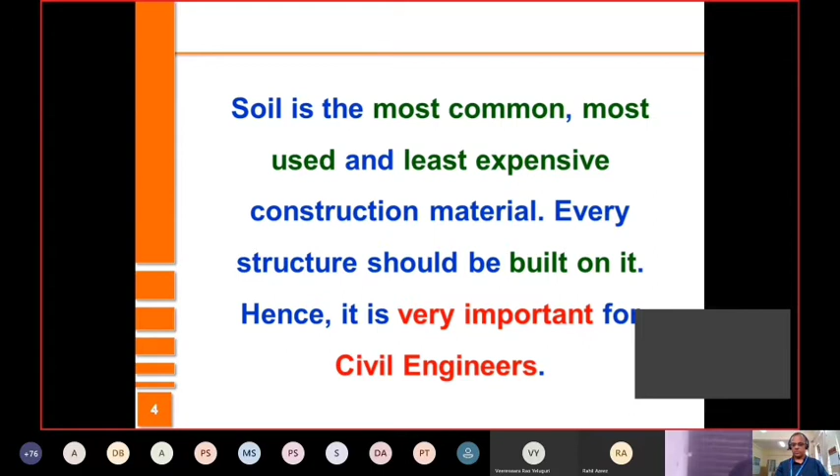In addition, you will build structures on soil only. It bears all the load of the structure. Therefore, I want you to accept my statement that it is most important to civil engineers. I quickly go through this. I mentioned that it is the oldest construction material. It is a material naturally available, and you don't have to spend anything for using this as a construction material.

You can modify the properties of soil. Today we have so much of advancement in technology, in geotechnical engineering. You can get the soil of whatever property you want today. You want to increase the safe bearing capacity from, let us say, 50 kilonewton per meter square to 200, you can do so. You want to make it very porous, you can do so. And then, I'll probably in one of the slides show you that it is a complex construction material.

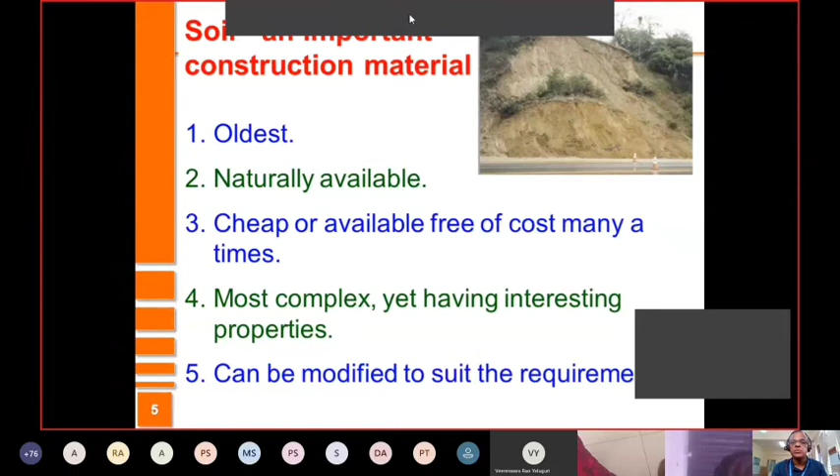Requesting control. No, don't accept. Don't accept. Oh, I just accepted it here. I don't know why. When I change the slide, can you see the change? You can continue now. No, it's fine. Are you able to see the slide change? Yes, we can see. Okay, okay.

And then I mentioned that soil is a material which is a combination of solids, liquid, and gas. And solids are of different sizes and shapes connected together by the contact. And when you apply the load, when you keep the soil for a long time, there is every possibility that the positions of the solids may change, and hence the volume of the soil may change. In addition, the void space may be filled with water sometimes, air sometimes. Therefore, with time these keep changing, which make the soil complex.

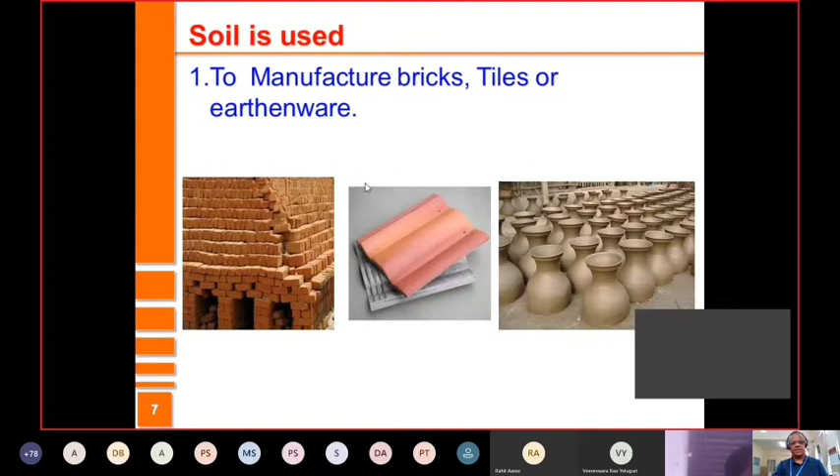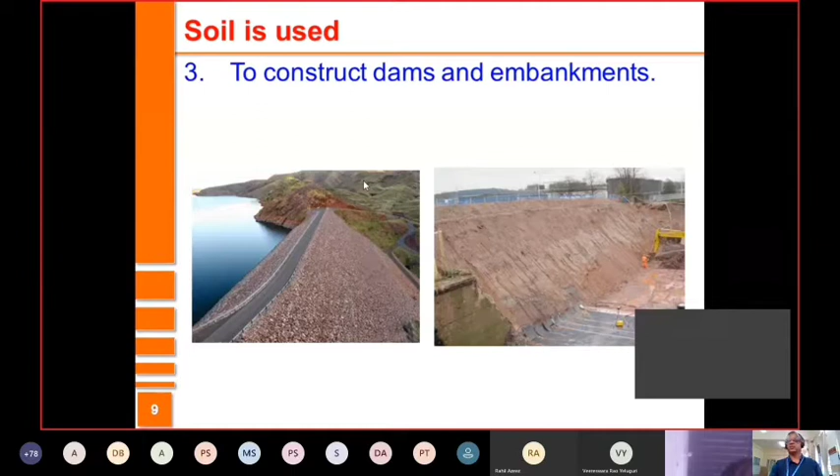I said, soil has many uses, many applications. One is the manufacturing of bricks, tiles, and earthenware. It is a foundation material. Everything is put on soil. Therefore, it takes the load. You use soil to construct dams. You use soil to construct embankments, and even to fill up the areas between.

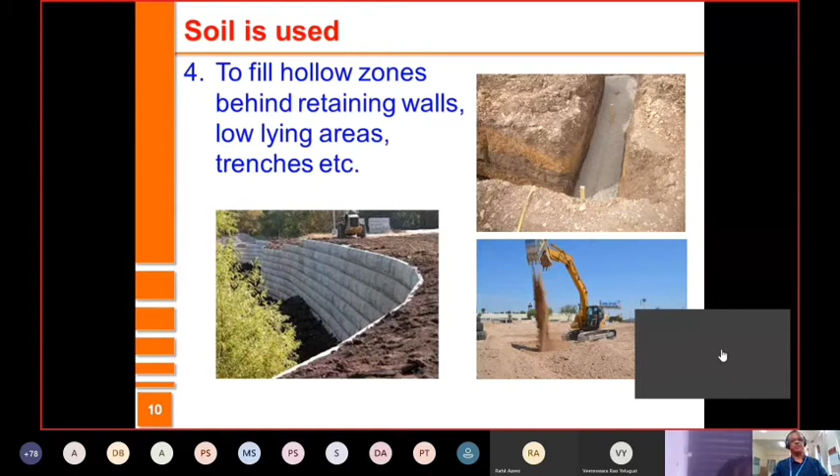Maybe you have a foundation built, and after building, the hollow spaces are filled with soil, or you build a retaining wall and the back of the retaining wall is filled with soil, or sometimes you may have a low-lying area, you want to fill it up. For that also you use soil. And unfortunately we use soil even for dumping waste. So for all the construction of landfills and many environmental protection structures, we use soil.

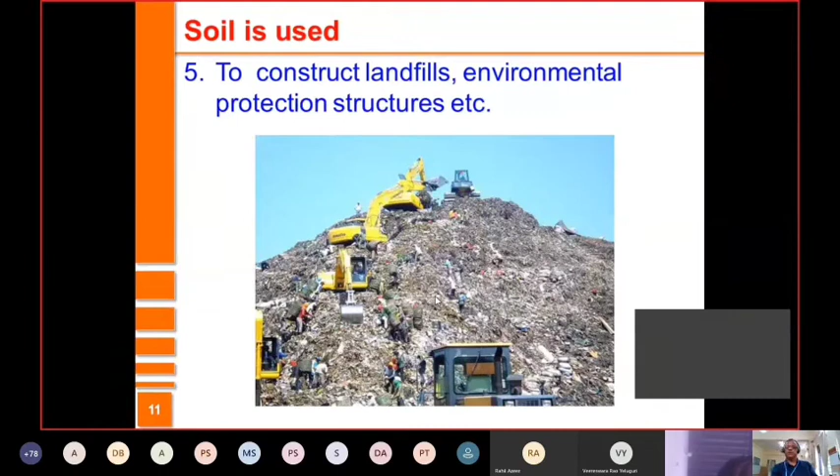I have named this topic as geotechnics for infrastructure because today is the day for infrastructure. When I say infrastructure, it could be the transport infrastructure, it could be building infrastructure, anything all over the globe. Emphasis is on that. And if you look at any budget, including the Indian budget, majority of the money is on infrastructure. Whenever we say infrastructure, it is always the civil engineers who have a big role to play. That's why today there is so much demand for civil engineers.

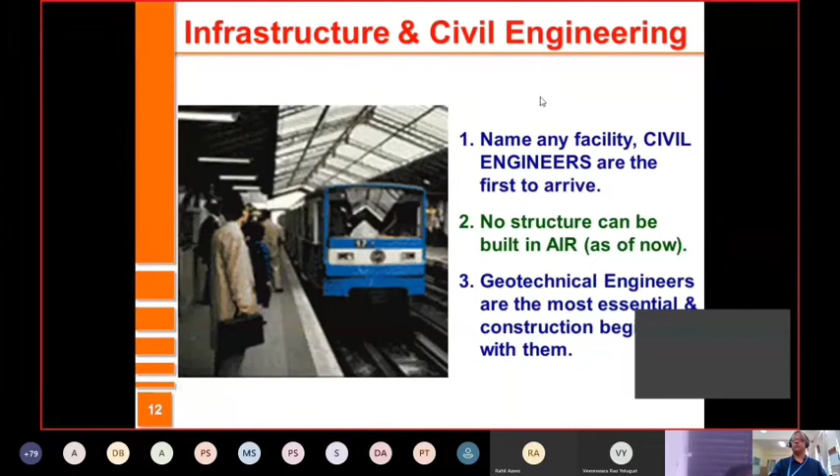And unfortunately, still we cannot build any structure in air. All of the structures will have to be built on ground. Therefore, any construction, anything in which civil engineers are involved, it is the geotechnical engineer who will always arrive first, who will always start the construction. So I'm just mentioning this to tell you the role of geotechnical engineers in infrastructure.

In general, if you take any structure, let us say you want to build a 20-storied building. One part of the building is above the ground, the superstructure, and the other is the foundation. So if you just think of the foundation construction, it has many stages involved. So imagine that you want to build a 20-storied building for which the foundation is to be built. The first thing you do is, you excavate to the depth at which you want to build your foundation.

Strictly before that, of course, you may these days have the exploration done through borehole, and still, after excavation, you try to see what kind of soil is there. If necessary, you possibly conduct field tests at the depth at which you want to build the foundation. Or in addition, you take samples of soil from here, and then take them to the laboratory and conduct tests. You conduct those tests which will help you in identifying the soil, which will help you in classifying it as per the Indian standards.

You also will conduct tests which will help you for the design. Maybe you want to design a foundation. Then you need SBC of soil. You need settlement characteristics of soil. So you conduct shear tests. You conduct consolidation tests. And hence, you prepare a soil report. And that soil report will be an input in the design office. You use the data from the soil report and hence design the foundation, design the geotechnical structure. And once it is designed, you prepare the drawing and you come back to the field and do the construction.

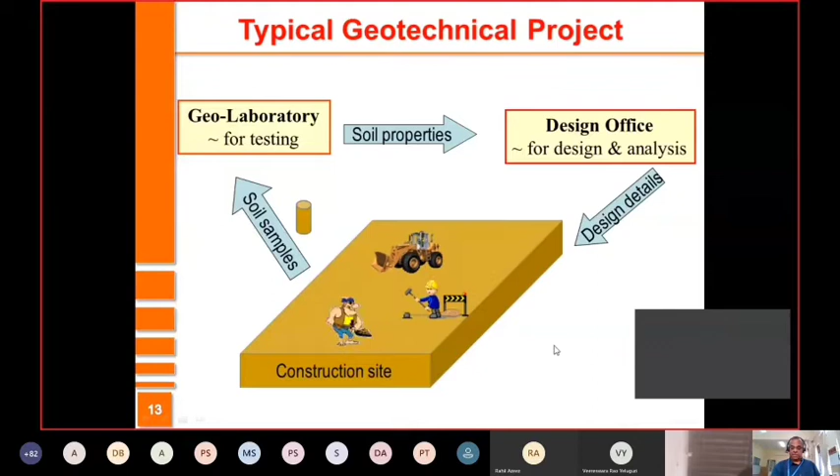Then, earlier it was foundation which was the most important geotechnical structure. I call a structure geotechnical when, whenever you are doing a design of it, you need the knowledge of not only the material which is used for the structure, but also the soil with which it is in contact. So therefore, all those structures which are in direct contact with soil, and when you are designing, you need the knowledge of soil, I have called geotechnical structures.

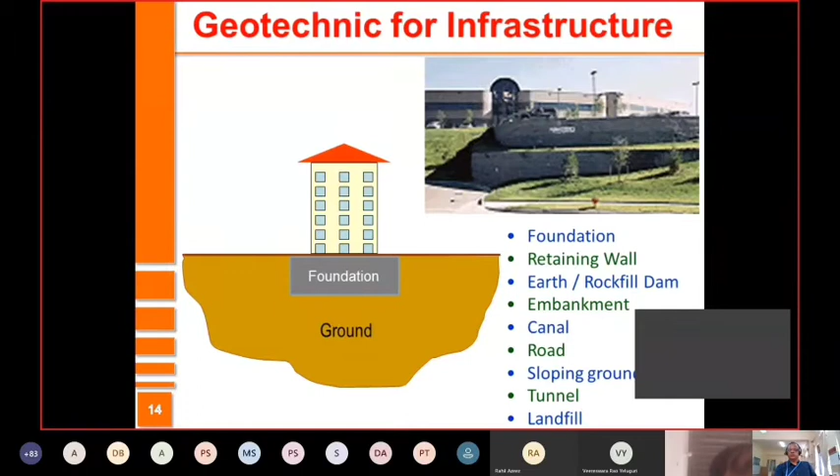So a geotechnical structure can be a foundation, a retaining wall, a dam, earthen dam, an embankment, canal, road, a slope, tunnel, landfill, many. Earlier days, the emphasis was on foundation alone. But today, all these are extremely important structures. In any project, you may have a combination of these: foundation, retaining wall, maybe tunnel, road, and so on. So all of them should be treated extremely importantly. And whenever you want to design any of them, you need not only the knowledge of the structure you're dealing with, but the soil with which the structure is in contact, with which the structure is interacting.

I was just trying to analyze what are the big challenges in geotechnical engineering. So I could list many of them. But from the elementary point of view, I just thought of talking to you about a few current challenges which we have in geotechnical engineering. As I said earlier, it is a complex construction material. So complex soil behavior, and then you have soils of all kinds. If you're lucky, most of the times you might find good soil, but then there may also be a tricky soil. There may also be a naughty soil. I just called it treacherous soil.

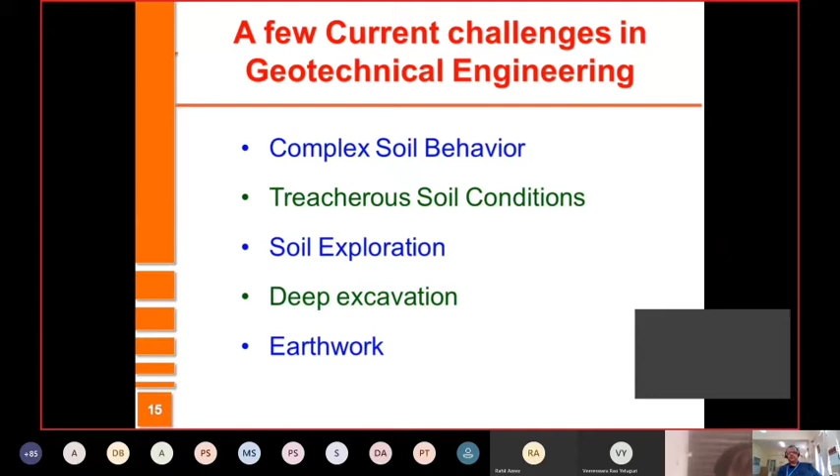Then one of the challenges we face today is exploring the properties of soil properly. Then we have problems with deep excavation and in general earthwork. Very quickly, we'll try to talk about each of them.

Soil is the most complex construction material you can ever think of. You have steel, you have concrete, but soil is very difficult to understand. If I give you steel and ask you to find out what its capacity could be, you will not take much time. You will say, okay, it can take this much load. Or if you subject it to tension, at this load it will fail.

If I give you a concrete block and give you some properties like how much of each material I have put, what is its age and so on, you will be able to estimate how much load it can take. But then it is not that easy to understand soil. If I ask you to assess how much load it can take, how much deformation it can experience, it is not that easy. The reason is soil has most of these properties which make it very complex.

Plus, the initial condition also plays an important role. I'm not going deep into all these things, which you can learn by yourself or already know. It is a porous material. It exists in different phases: solid, liquid, gas. It is permeable, particulate, heterogeneous, anisotropic, and so many of these.

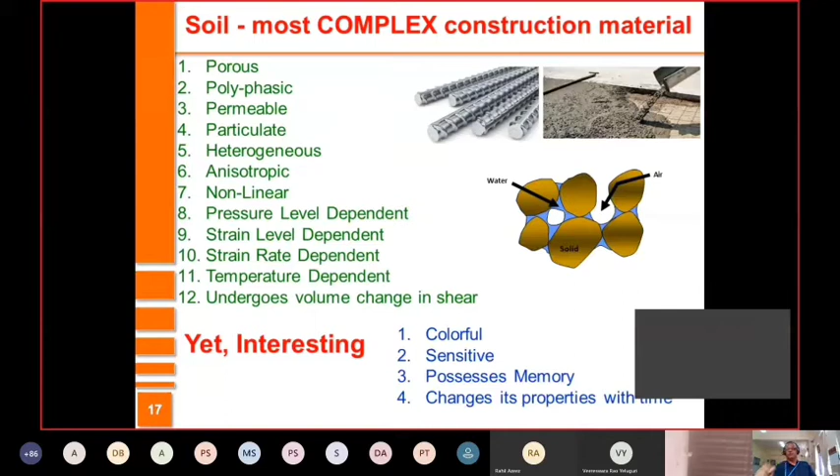And absolutely, if you don't make mistakes, I assure you, soil will never misbehave. And hence, you will never have problems of failure of structure because of soil. So take care about this aspect.

Then, as I said, you have soils of all kinds. At a given place, most of the time you may find good soil. But as I said earlier, sometimes soil can be not good. Sometimes soil can be a difficult one. If you look at our Indian condition, we have many soils which are difficult to deal with. So I just call them treacherous soils in India. I have listed a few of the treacherous soils in India.

Say marine clay, as the name itself indicates, it is clay which is seen in coastal India. We have a long coast from west to south to east, thousands of kilometers long. And here we have marine clay. And then you have alluvial soil, young soil. It may be on the river banks, so Indo-Gangetic Plain, Kaveri, or it may be elsewhere also, which is a young soil. And then you have desert sand, especially in Rajasthan and the upper part of Gujarat.

And we have expansive soil, BC soil, Indian black cotton soil. About 30% of the country, especially in Karnataka, Maharashtra, and a little of Andhra Pradesh and Tamil Nadu, at various locations we have BC soil. We also have lateritic soils, in the west coast and also in the Bidar region in Karnataka, northern part of Karnataka. And at many places I have seen this loose silt, especially in the Western Ghats, loose silt.

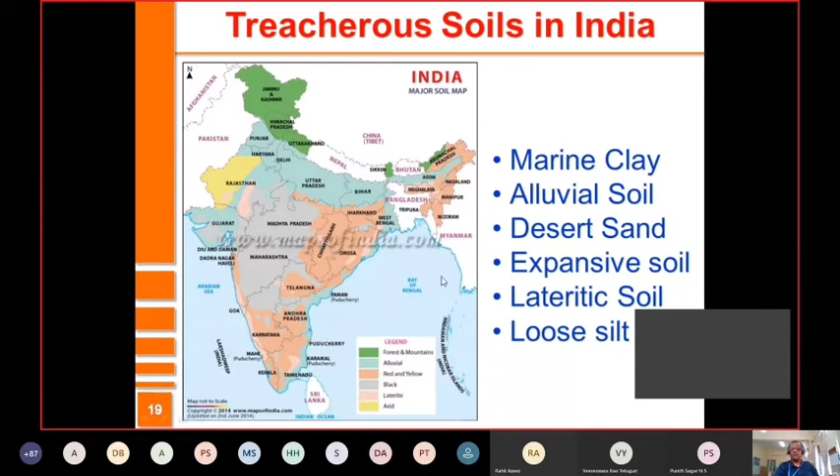So each of these creates some problem or the other for the construction engineer, and you have to be careful with them. I tried to list the kind of problems you face with different treacherous soils. For instance, marine clay, it is a soft soil, extremely plastic. Therefore, what you have to be worried about is compressibility, the settlement. So if you want to build any structure on it, you have to check what kind of settlement it experiences. And if it is within limits, okay. If not, you may have to treat the soil or maybe change the kind of structure you are planning.

And in general, it also has low strength. SBC is low. So you can't build any structure straight away on this. In addition, because it is marine clay, it contains a lot of salt. Therefore, any construction material like concrete or steel, if you use it, you have to be bothered about the weathering action. So you need to think about the effect of salt on concrete or steel. Therefore, you have to protect them from this.

Alluvial soil, it's a young soil, recently formed. Therefore, it is likely to have very low density. It is likely to have very low bearing capacity. And in earthquake prone areas, it is also likely to have liquefaction characteristics. It could be clay or it could be sandy soil. And if it is clay, quite likely the safe bearing capacity of the soil is low, which means, if you want to build a complex structure, automatically the construction of the foundation is a challenge.

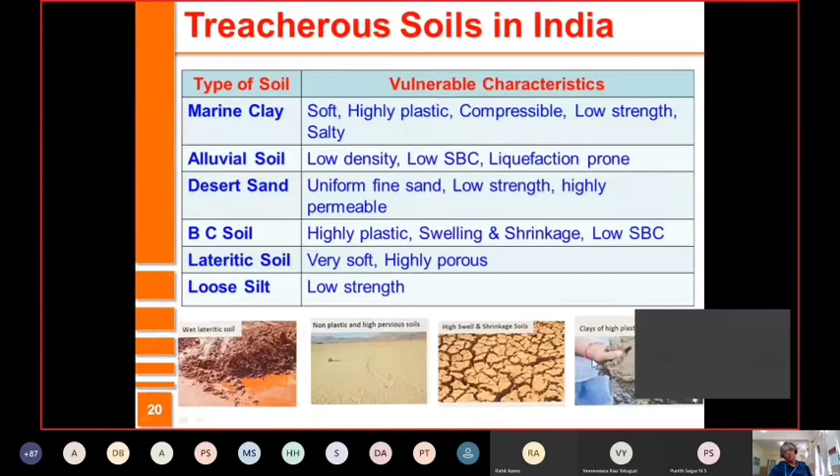So I have shown you different pictures of treacherous soils. This is BC soil, this is lateritic soil, and this is the sand, desert sand, and you have highly plastic soil. Could be alluvial soil or marine clay. So whenever you deal with treacherous soils, again, don't take the decision by yourself. The message is you have to be careful.

The third problem which I posed is with respect to soil exploration. Whenever you want to do any construction, it is essential that you should know the kind of soil you have there. It is essential to know how much load it can carry, what its safe bearing capacity is. And when you put the load, when you put the structure, will it deform? If so, how much?

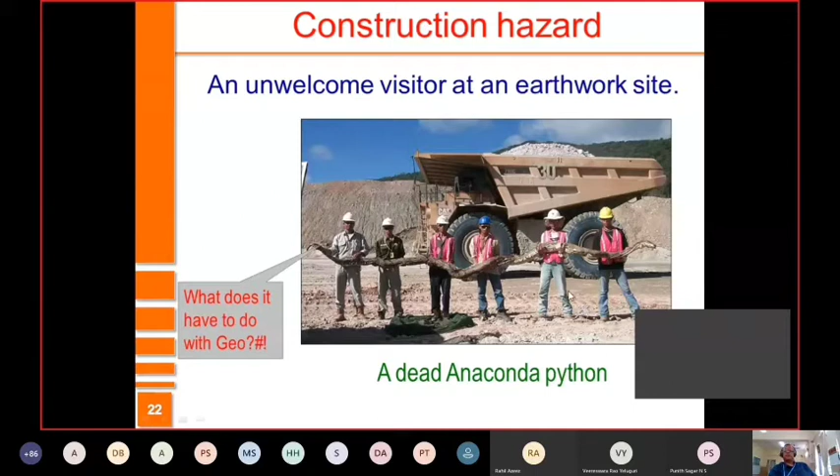And when they were digging, when they were exploring, they found this. Can you see this? This is a python. Fortunately for them, this was a dead python. So until you explore, you will not know what is there. So it is extremely important to explore properly what kind of material is there below the ground. That is exactly what these people are doing.

Either by open excavation, people try to understand what is there, or maybe you're going to have boreholes from which you try to find out the kind of soil you have at different depths. And you can do that only at a few places, not everywhere. That is a big challenge. So you have to predict what will be there in the other places.

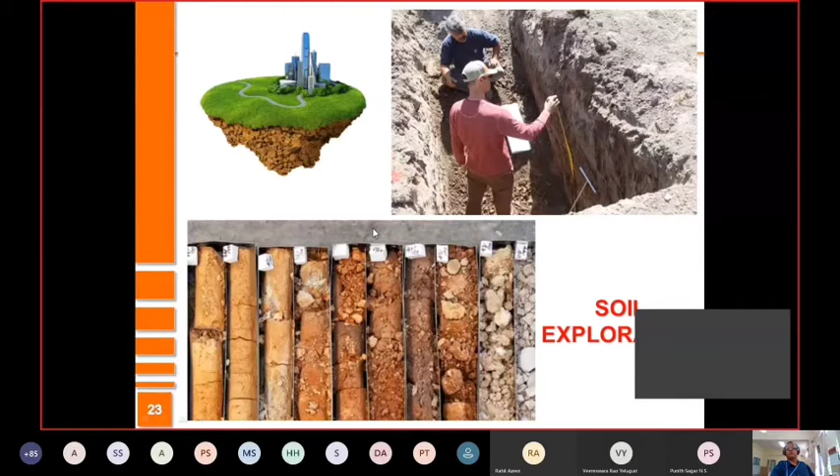And you can see in this picture, soil is of different nature, different color, different texture, same borehole at different depths. And that is the challenge the geotechnical engineers will have. So till what depth you have to go, and then what kind of a foundation to put is a big challenge.

Normally, in a soil exploration report, soil test report, people actually do the test, then collect the data and represent those data. In addition, they do the analysis and they make certain recommendations. Normally, a soil report will have a borehole detail, something like this, in which along the depth, the different kinds of soils encountered are shown, at what depth the groundwater table is there is shown, and then you will have the report of SPT N value from ground surface till certain depth at an interval of sometimes 0.5 meters, but usually about 1 meter or so. These days you may even have the shear wave velocity.

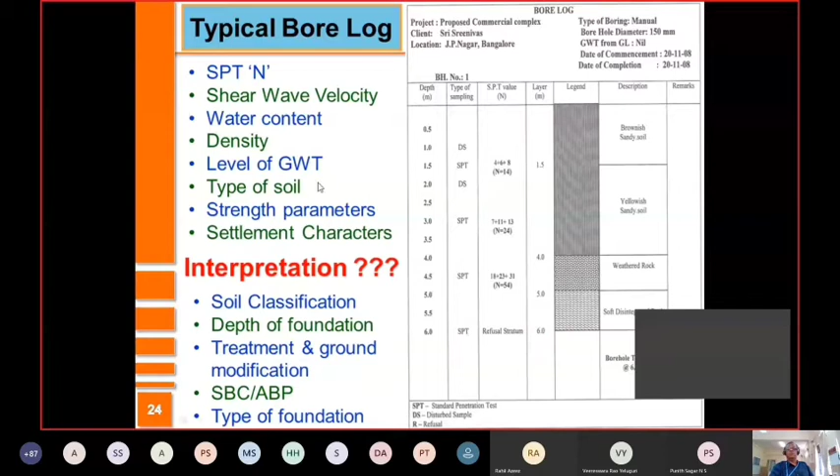You'll try to find water content in soil, density, type of the soil, strength parameters of soil, settlement characteristics, at different levels. Use this data to interpret and find out what is the classification of soil, at what depth you need to build your foundation. So you have to recommend the depth of foundation. You have to recommend the type of foundation if possible. And if there is any ground improvement required, you will have to recommend. You, of course, will give SBC of soil. Sometimes, instead of interpreting it as SBC, we interpret it as allowable bearing pressure. So these are all the things which are necessary in a complete soil report.

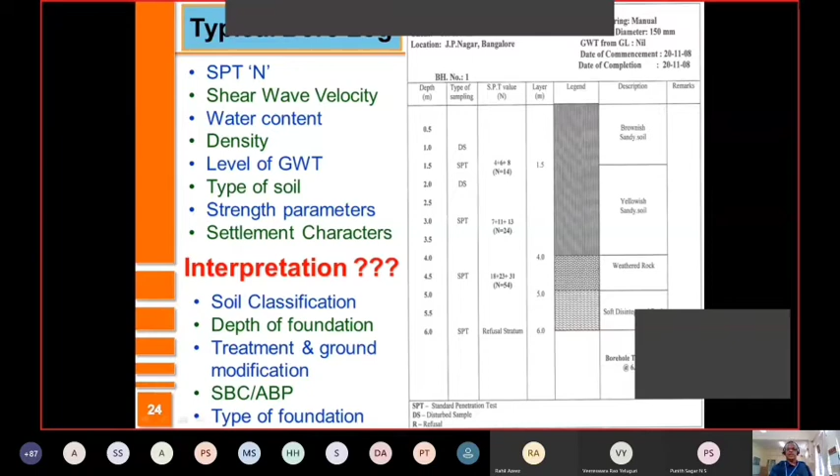Unfortunately, as of today, we don't have many good, reliable soil testing companies, and hence you are likely to have very erratic reports. So friends, I tell you to go to trustworthy people and try to get the best out of them, because only when you have a good soil report, you'll be in a position to think of savings in foundations, and hence savings in total cost.

I've just tried to show here, if you have an ordinary site where you have good soil, if you don't do any soil testing, the cost of the project is generally going to be high. But if you test soil, you will be in a position to say that the right soil is available here at the right depth. Therefore, you can think of the most economical foundation, and hence the total cost of construction will come down. You need to do that much testing which is required.

But if you keep on testing, if you unnecessarily do a lot of tests, of course the cost is going to increase. So you need to think of those optimal tests at which you will be able to exactly know the property of the soil required, and hence suggest the right kind of foundation treatment. So total cost is going to reduce at this point, but if you unnecessarily take more tests, cost is going to increase. Same thing happens in a treacherous soil condition.

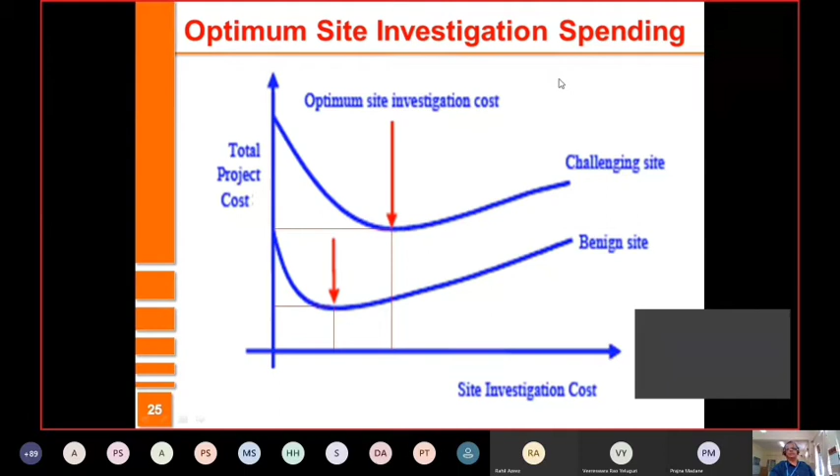And the doctor would possibly give the medication without testing, but today testing is essential. But if it is a simple problem, you undergo simple tests. If the problem is more complicated, the doctor will advise more tests. But he should not unnecessarily ask the patient to go for more or rigorous tests, even for a smaller problem. So exactly in a similar way, you need site investigation, the right kind of site investigation. And from that, you will be able to have a lot of savings in the project cost, and you will be able to build a robust and safe structure also.

Well, the other problem today is deep excavation. See, in cities, we have very limited space. Already built structures are removed, and then you are going to build more structures. Naturally, because of the limit in space, you build them vertically. Tall structures are common. And when you build a tall structure, automatically you need to think of foundations which are taken deep into the ground. So deep excavation becomes essential.

And many times when you build a tall structure, you will also try to have one or many floors of cellars, maybe for underground parking. Sometimes you may have 3 floors, 4 floors below the ground. That means you need to excavate at least 3 meters for every floor. If it is 3 floors, you need an excavation of more than 10 meters. Next to it, there may be an existing building, maybe a tall building. So you need to make an excavation.

Friends, today we have been seeing a lot of casualties due to excavations done improperly without taking the support of a good geotechnical engineer. There are statistics that among the fatalities that happen, the construction worker suffers the most. So you have to be careful as engineers. Most of the fatalities happen because of excavation, because proper care is not taken during excavation. That is the statistics available, which means you have to be very, very careful.

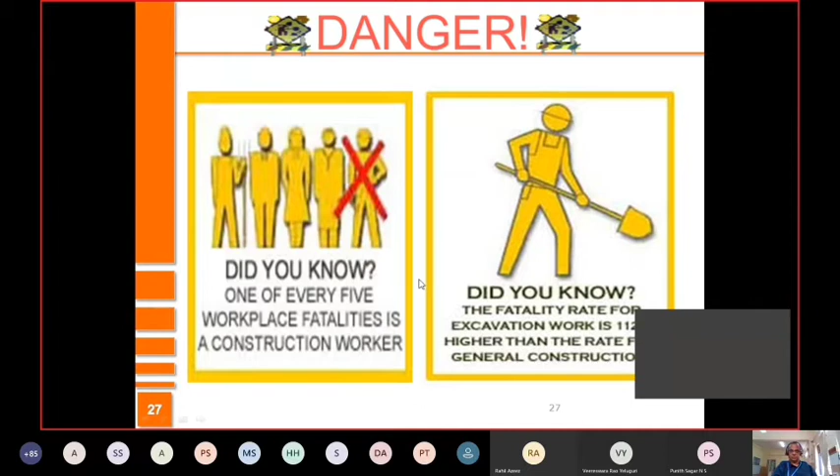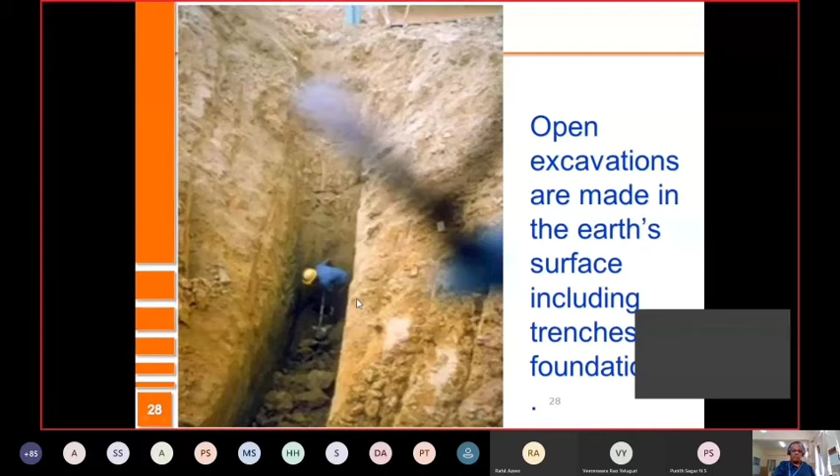You see here, this worker is trying to clear up the soil, maybe for putting the foundation. He has no idea what kind of soil is here. What is it going to do? Is it likely to fall down? Is there any problem? Maybe there will be heavy rain. Maybe some heavy vehicle will come and stand here. And if the soil decides to collapse, there is absolutely no way you can save him. So we have to be extremely careful. We should be able to monitor, or understand what it can do, and provide good supports. There have been, unfortunately, many casualties in the past.

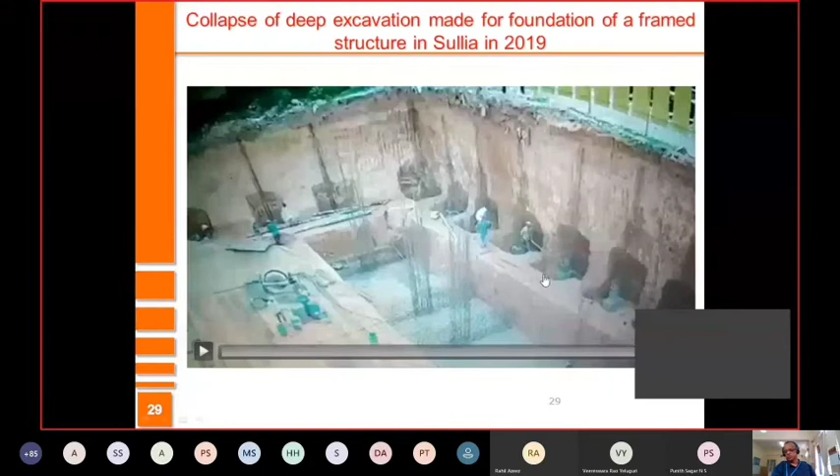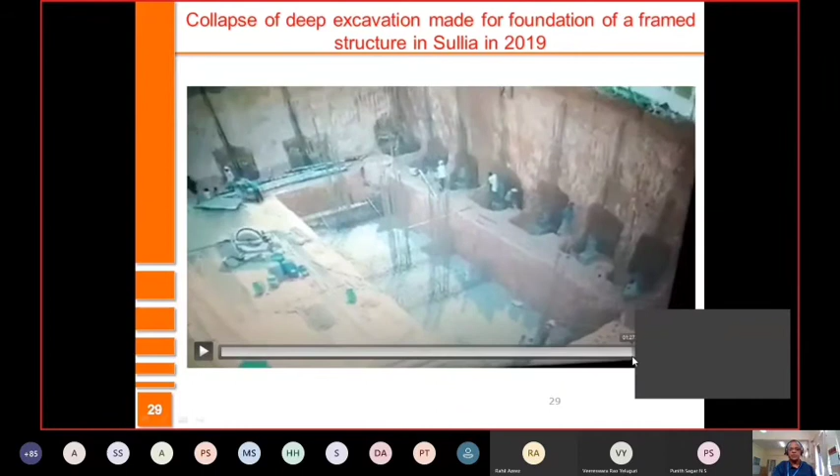All people are working here. I'll just try to show you here. People are working continuously, and they have absolutely no idea about what is happening to the ground. We don't know whether the ground is intact or it has decided to collapse, and suddenly you will see that the entire thing comes down. You can see that this has come down.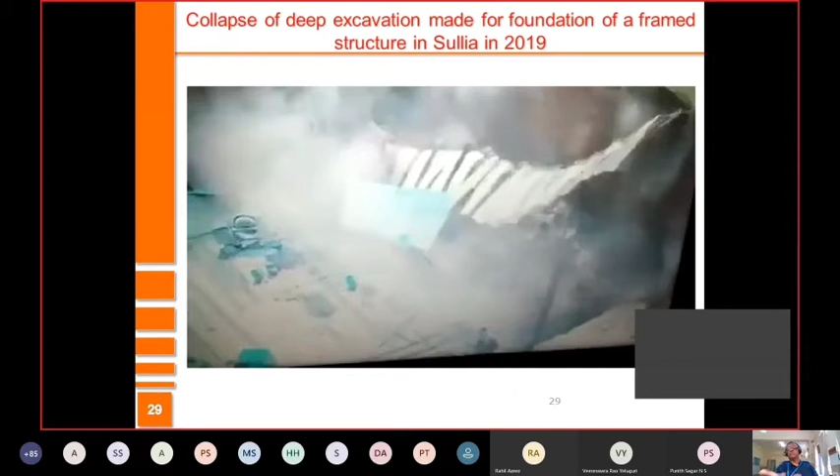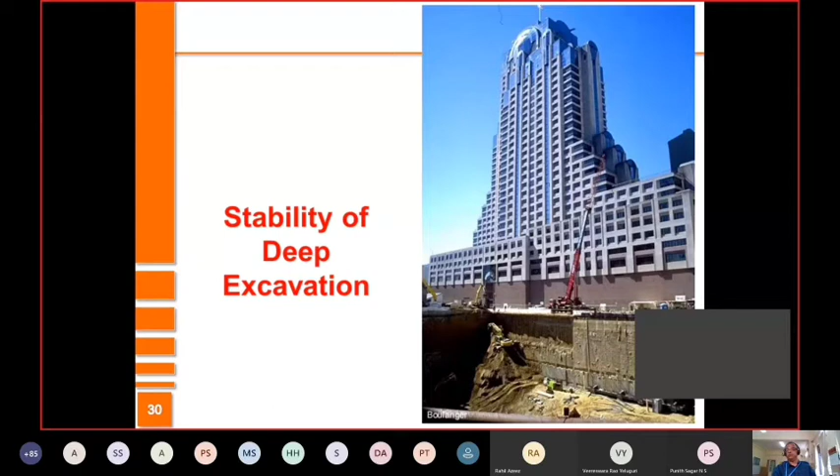Okay, and whenever it is next to impossible to control, inside soil will be building the stresses, and when these stresses are within the strength of the soil, it is okay. Once it exceeds, there will be an explosion like this. It will be a sudden collapse, and you will have hardly any scope to save anybody working there. And this is a common thing which happens during construction, and hence while you are thinking of deep excavation, you should be very careful.

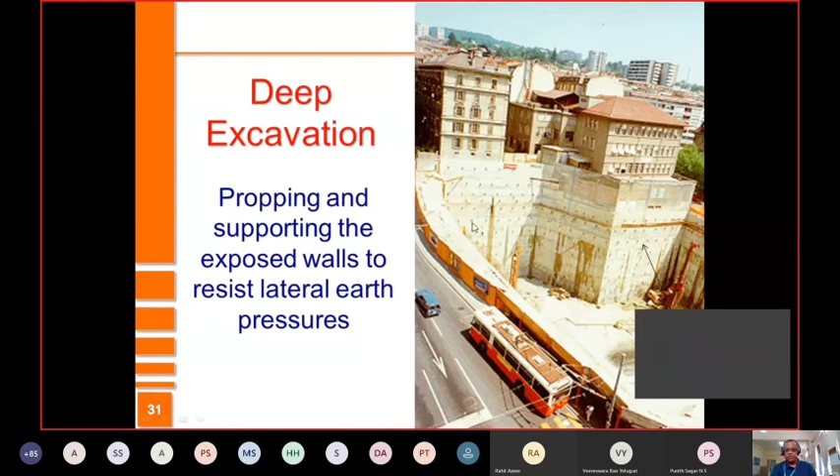You can see here excavation is done, next to it there is a tall structure. Here also excavation is done, next to it there is a tall structure. So what they have done, they have thought about some kind of a treatment here. The treatment here is a soil nail which is put. So you can see these dots, all these dots suggest that some kind of a protection method is followed. There are many techniques today. You can use any of the techniques as I have listed here, which will help you.

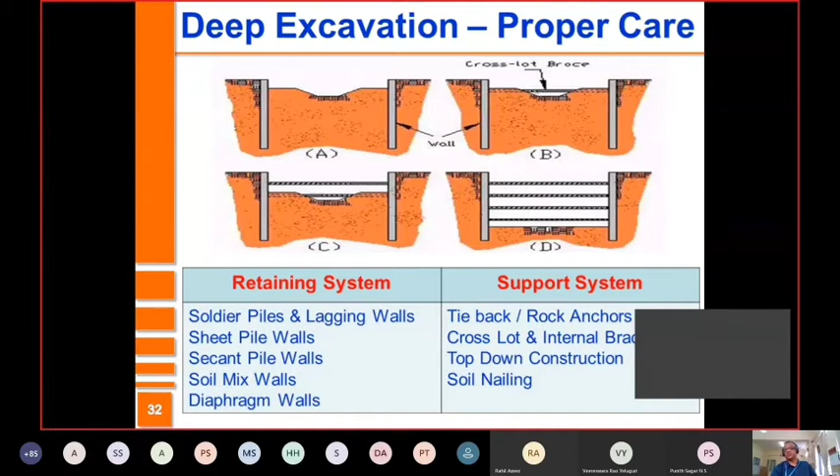In general, all these require earthwork. But friends, my advice is you minimize earthwork to whatever extent possible. The lesser the earthwork done, the better it is for the soil. It is not unnecessarily stressed. Either when you put more soil on top or when you remove the soil, the stresses in soil are going to change. Sometimes vertical stress will increase, sometimes horizontal stress will increase. All these cause a lot of problems.

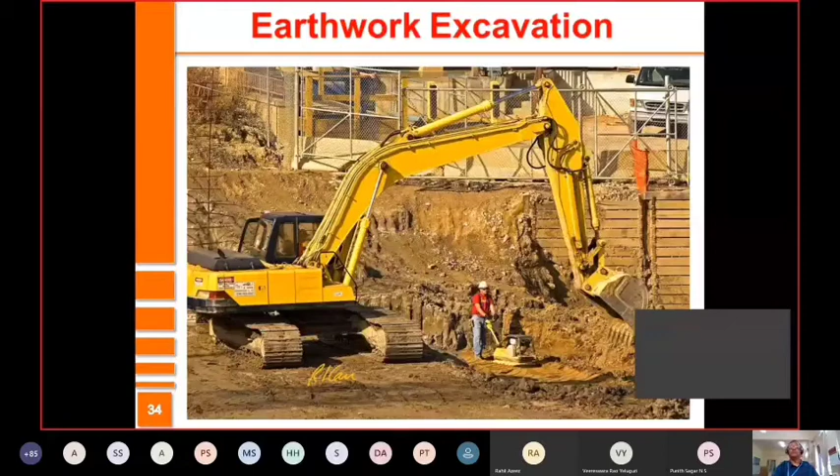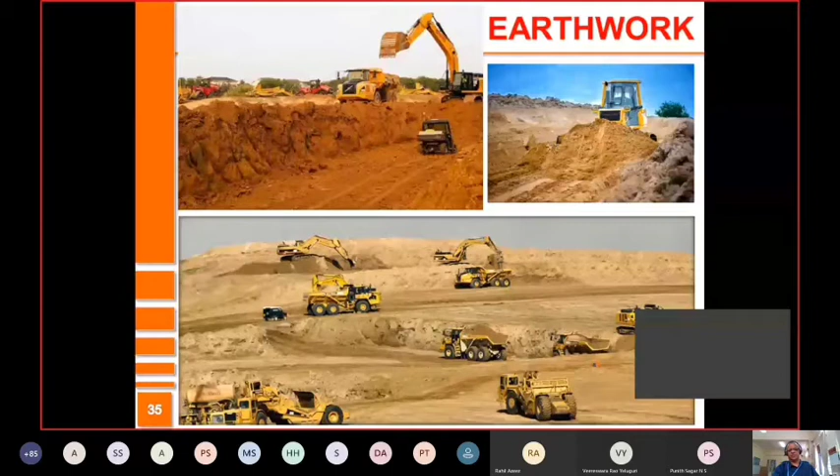So I always say, the more you minimize earthwork, the safer you will be. So try to keep the earthwork as minimum as possible. Of course, I cannot say stop earthwork excavation, because we have projects, we have infrastructures which require a huge amount of earthwork.

Well, one important thing I always say in geotechnical engineering is it is a combination of both science and art. It is not just only scientific. You need some experience also. So if you have a problem and you approach two different geotechnical engineers, quite likely both of them may give two different treatments or solutions. You don't need to panic. If they know very well what exactly the situation is, the two solutions can be very, very different, unlike in the case of structural engineering.

He's troubling this animal. If he himself sits, people say that he's cruel when he makes his wife walk. And if he makes her sit, people call him an idiot. And again, if both of them walk along with it, people again say certain things. So don't worry about what people say. You just have to believe in yourself. You just have to have faith and confidence within you. And if you give a solution which is rational, I'm sure it is going to be perfect.

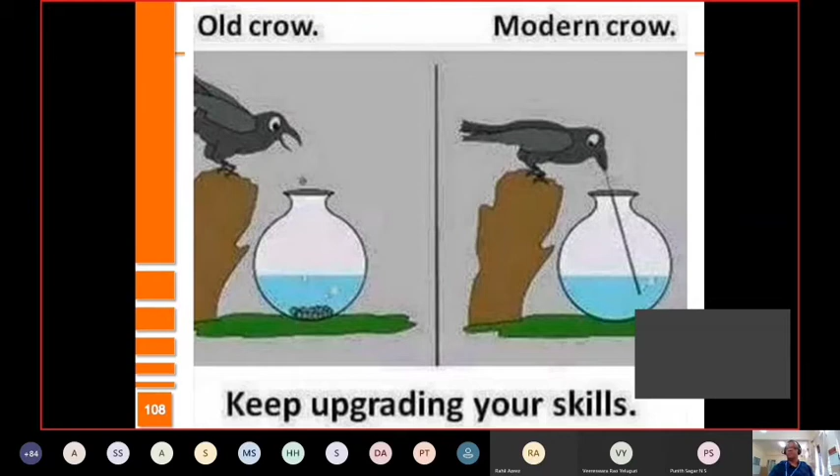We are going in for taller structures. We are almost having a 1 kilometer tall structure now, but there is a saying about much taller ones.

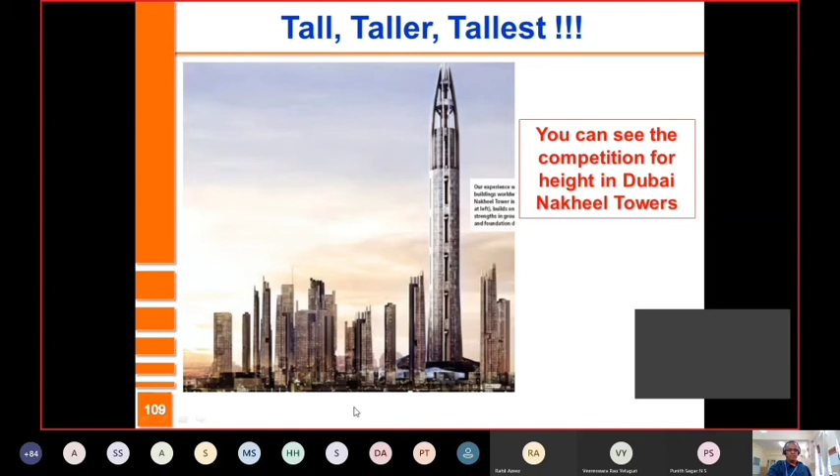Who knows, very soon we will have 1 mile structure, and later on much taller ones. So when you build tall structures, please note all of them have to be built on ground. There are many challenges a geotechnical engineer faces, and we need to be extremely careful. And today, geotechnical engineering is as much grown as the superstructure engineering, the structural engineering.

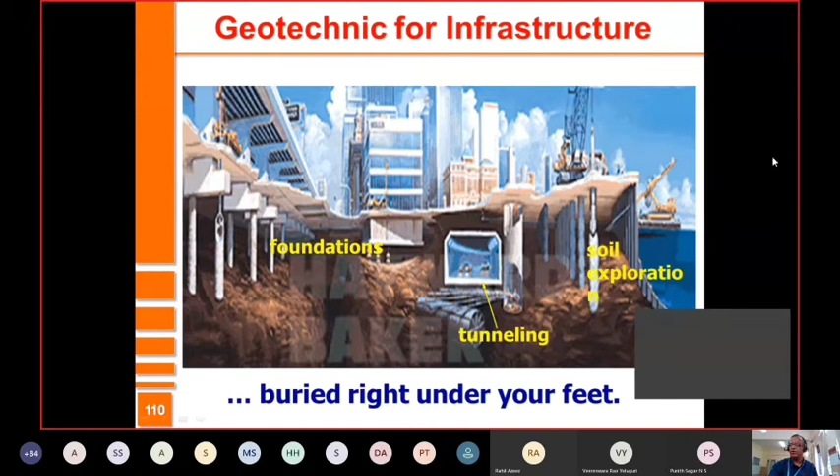Lot of activities do happen below the ground. It could be foundation, it could be tunnel, it could be soil exploration, retaining wall, several things. Who knows, we might even build a city below the ground. Already we have a lot of metro stations, you have big markets in those places. So we have lot of activities possible, and geotechnical engineers are going to have big time in that. That's why I called my lecture as Geotechnics for Infrastructure.

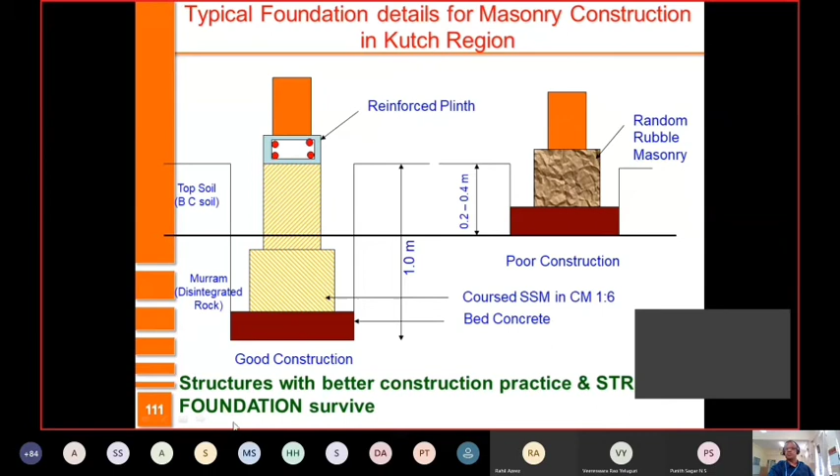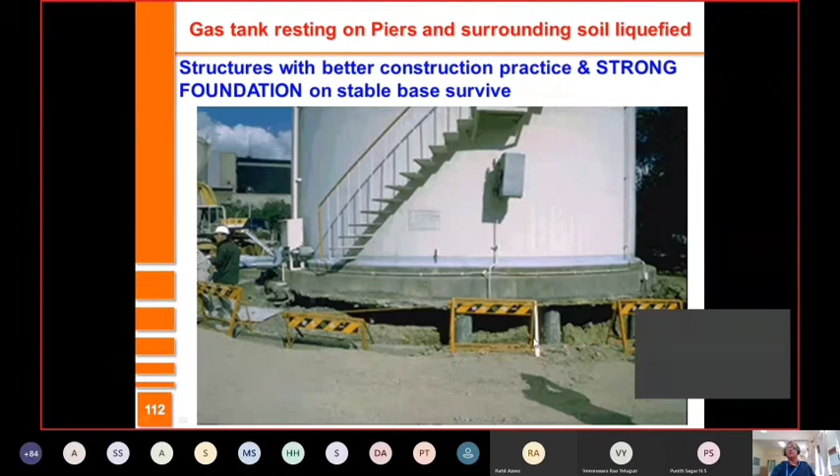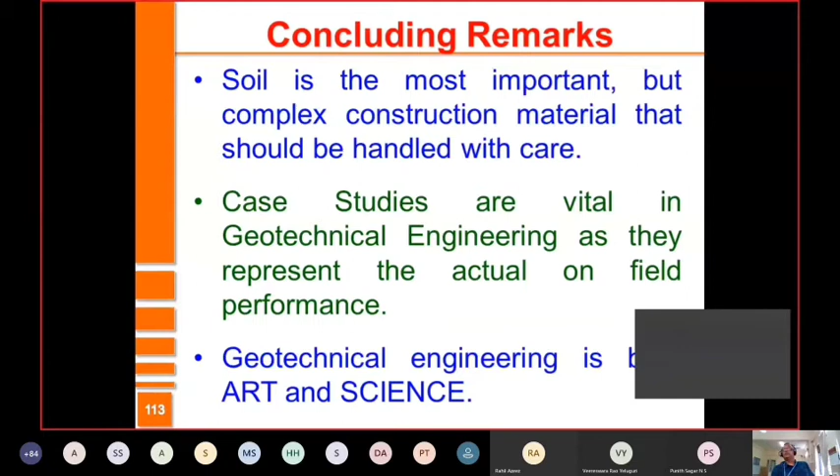So with this, friends, I conclude mentioning that soil is the most important construction material, and because it has complex characteristics, you have to handle with care. I'm sorry I could not spend time on case studies, but in general, case study is very important in civil engineering, even more so in geotechnical engineering, because of a lot of complexities in soil. Only by case studies you will be able to understand the performance better. And as I told, geotechnical engineering is both art and science.